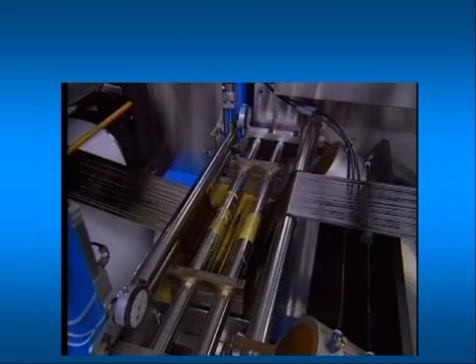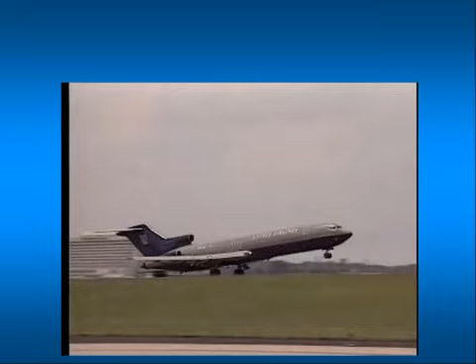Next we will talk about composites and composite structures. Composites can be defined as a combination of two or more materials working together. Each contributes its own structural properties and each retains its unique identity. Composites synergistically combine these two materials into something much better.

Wood is a natural composite and consists of fibers reinforced with resin. Wood has very similar protective properties to composites. It does not corrode, it has very high fatigue life, and it has a relatively low radar signature.

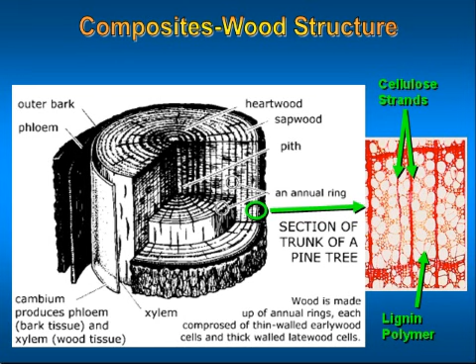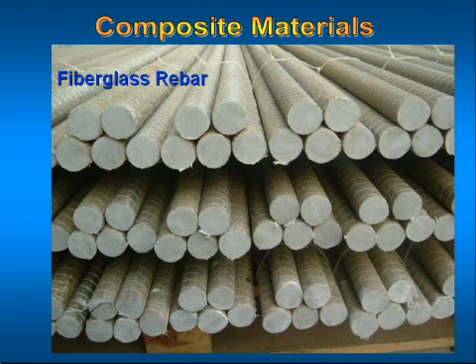Non-metallic materials, also known as composite materials, offer many advantages over other materials. Within aerospace markets where exceptional performance is required but weight is critical, composites continue to grow in importance.

Some of the many advantages of composites are: stronger and stiffer than metals on a density basis. For the same strength, they are lighter than steel by 80% and aluminum by 60%. Highly corrosion resistant, most composites are essentially inert in the most corrosive environments. Outstanding durability; well-designed composites have exhibited apparent infinite life characteristics, even in extremely harsh environments.

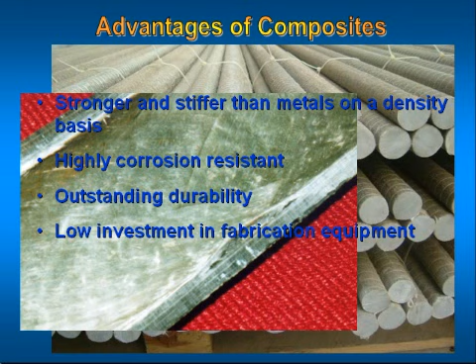Low investment in fabrication equipment. The inherent characteristics of composites typically allows production to be established for a fraction of the cost that would be required in metallic fabrication. From virtual to real is the track that aircraft follow.

Here the Boeing 787 Dreamliner takes shape. Its fuselage, made of composites, consists of 4 cylindrical sections. Composites, because of their light weight and strength, are gaining favor as a material for aircraft.

The Boeing Company's 787 Dreamliner, officially unveiled on July 8, 2007, has become the poster child for composites in aircraft design because the design uses composite materials extensively. According to Boeing, composite materials constitute about 50% of the aircraft by weight.

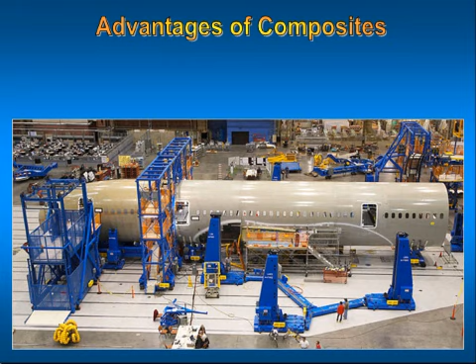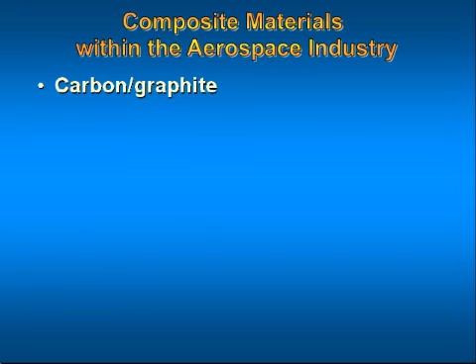Several composite materials used in the aerospace industry are carbon graphite, fiberglass, Kevlar, and thermoset plastic. Carbon graphite fiber composites are noted for their stiffness and high compressive strength.

One of the problems with carbon graphite as a structural material is the fact that aluminum alloys in contact with it will corrode. For this reason, fasteners used with carbon graphite must be made of corrosion-resistant materials such as titanium or corrosion-resistant steel.

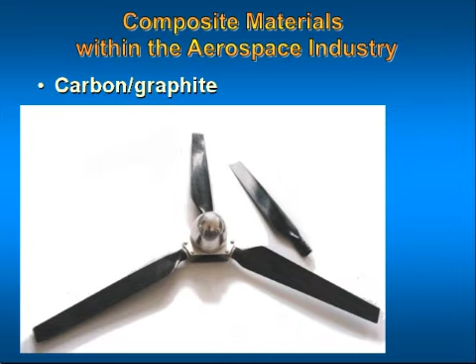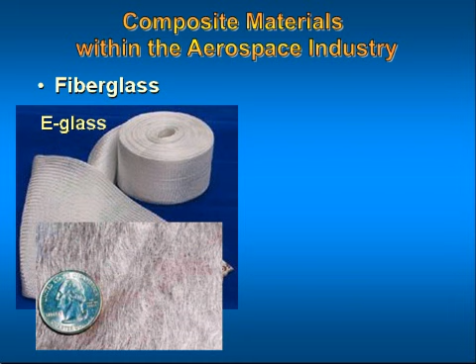Fiberglass: there are 2 types of glass fibers used in aircraft composite structure, E-glass and S-glass. E, or electrical glass, has a high resistivity and is designed primarily for electrical insulation. Its low cost makes it the more widely used type of glass where high strength is not required. S, or structural glass, has a high tensile strength and is used for critical structural applications.

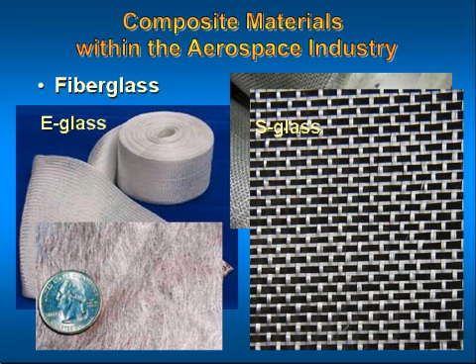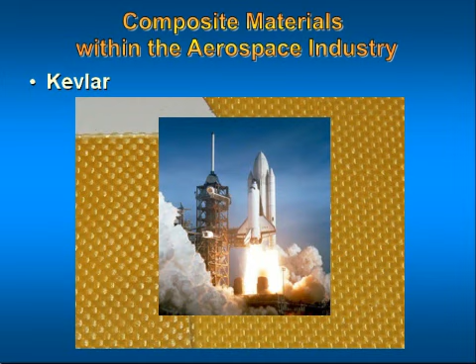Kevlar is an aramid fiber that is noted for its flexibility and high tensile strength. It does not conduct electricity and does not cause aluminum to corrode when it is held in contact with it.

Thermoset plastic: a class of plastics that, when cured by normal thermal and/or chemical means, become substantially infusible and insoluble. Once cured, a thermoset cannot be returned to the uncured state. Some of the more common thermosets include epoxies, polyurethanes, phenolic amino resins, and polyamides.

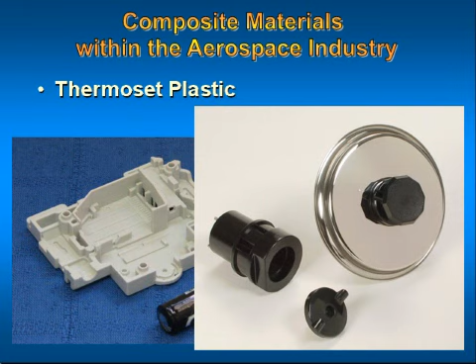This section is designed to familiarize you with the materials and processes associated with the aerospace industry.

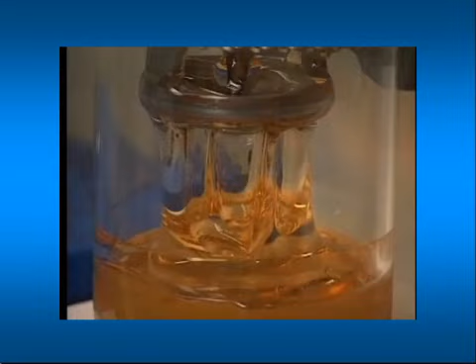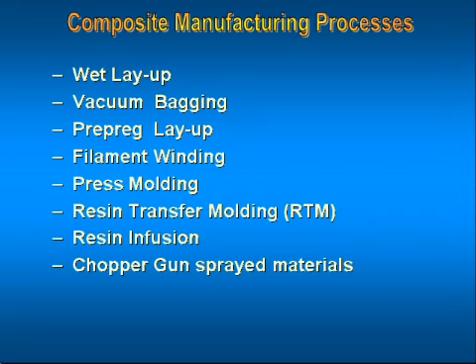Next, we will talk about some of the composite manufacturing processes used in the industry, such as wet layup, vacuum bagging, prepreg layup, filament winding, press molding, resin transfer molding, and resin infusion.

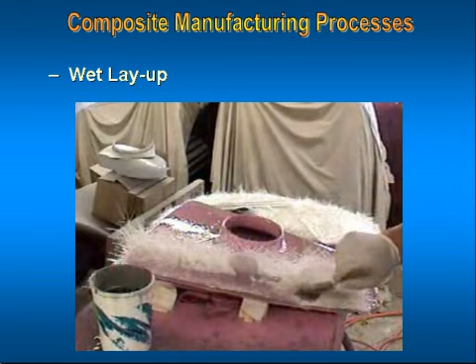Wet layup: the manual wet layup is the oldest and simplest composite technique. It usually requires use of a tool or mold and requires a release agent. The surface can be wet or sprayed with resin or a gel coat.

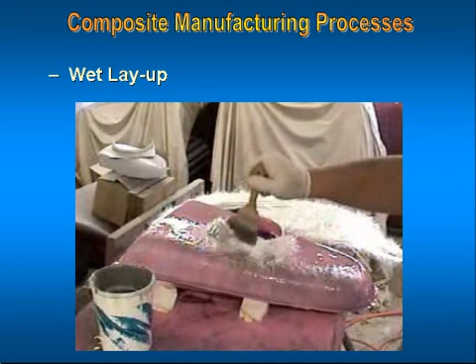The gel coat is allowed to partially cure before the addition of fabric. The fabric can be applied dry, saturated with resin, or sprayed with a chop gun. Excess resin is then removed by hand working.

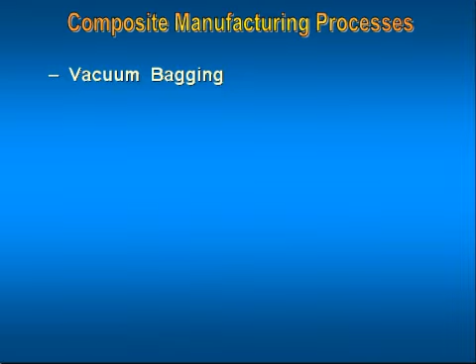Vacuum bagging is a technique employed to create mechanical pressure on a laminate during its cure cycle. Pressurizing a composite lamination serves several functions. First, it removes trapped air between layers.

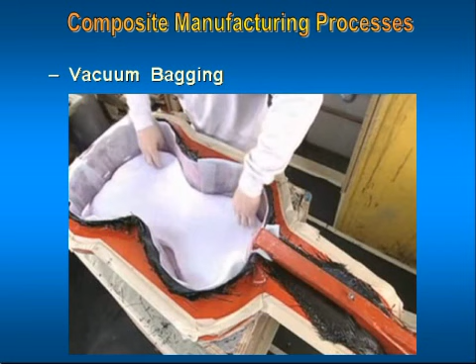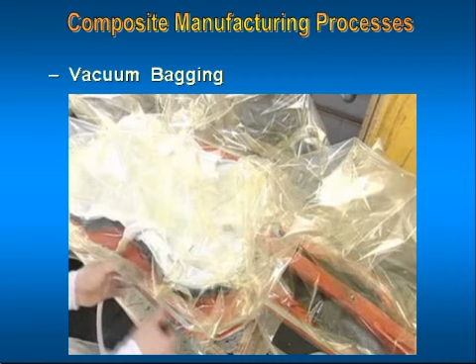Second, it compacts the fiber layers for efficient force transmission among fiber bundles and prevents shifting of the fiber orientation during cure. Third, it reduces humidity. Finally, and most important, the vacuum bagging technique optimizes the fiber-to-resin ratio in the composite part.

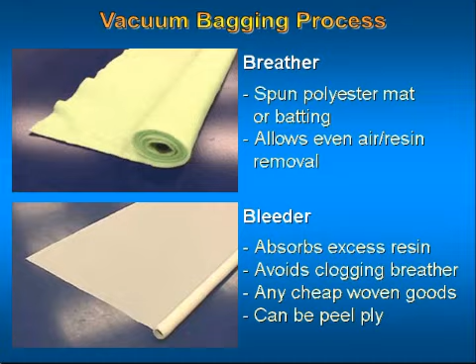This is an example of a vacuum bagging process. In the vacuum bagging process, you will normally use a bagging film, release film, breather material, bleeder material, and peel ply. A caul plate is placed in immediate contact with the layup during curing to transmit normal pressure and provide a smooth surface on the finished part.

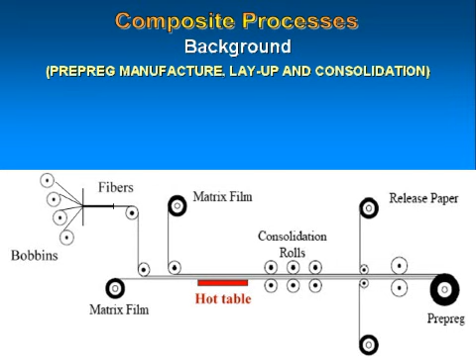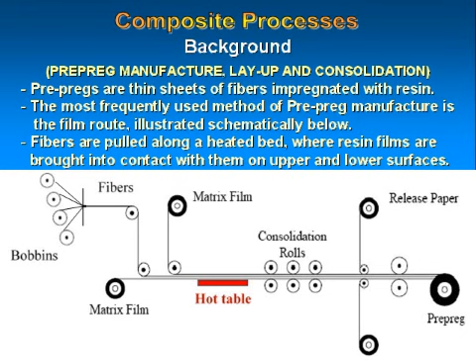Pre-preg material can be used in the vacuum bagging process. Pre-preg fiber is pre-impregnated with resin, hence the name. In this diagram, lay-up involves the cutting and stacking of pre-preg layers in a predetermined sequence of fiber orientations. The matrix resin is cured by exposure to a defined combination of temperature and pressure.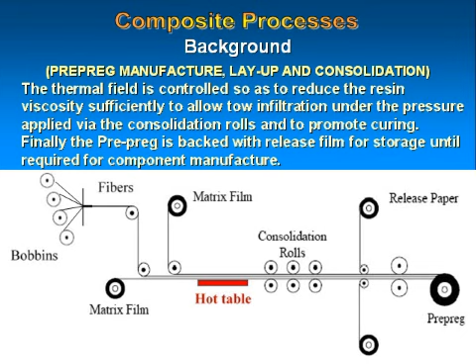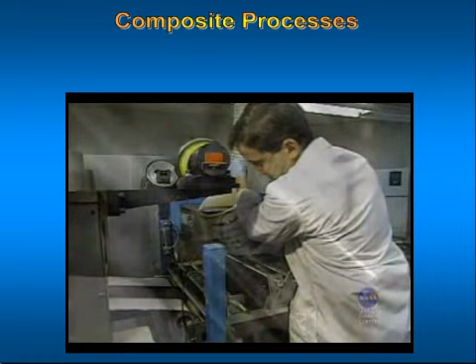This diagram shows how pre-preg fabric is manufactured. The fibers and matrix film are joined together, heated, and then rolled with release paper to keep it from bonding. Pre-preg must be stored at below 0 degrees Fahrenheit, and its shelf life is only up to 1 year.

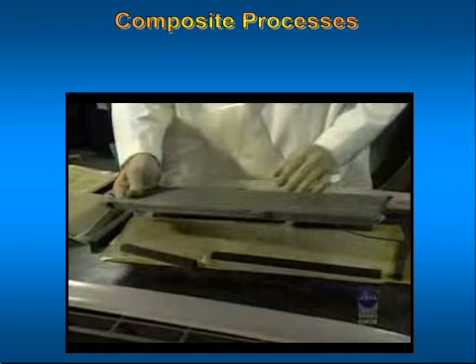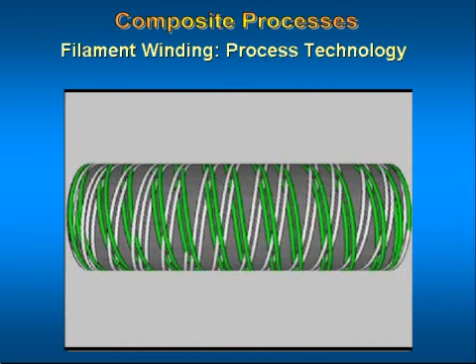With filament winding, a large number of fiber rovings are pulled from a series of creels into a bath containing liquid resin, catalysts, and other ingredients such as pigments and UV retardants. Fiber tension is controlled by guides or scissor bars located between each creel and resin bath.

Just before entering the resin bath, the rovings are usually gathered into a band by passing them through a textile thread board or stainless steel comb.

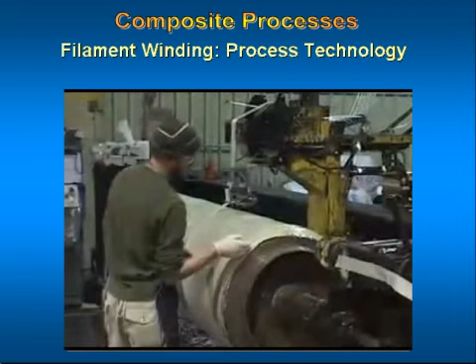Press molding: press curing uses heated platens to apply both pressure and heat to the part. Presses in general operate at 20 to 1000 psi and up to 600 degrees Fahrenheit.

Press curing is very economical for flat parts and high production rates. Tooling requires matched die molds for contoured parts.